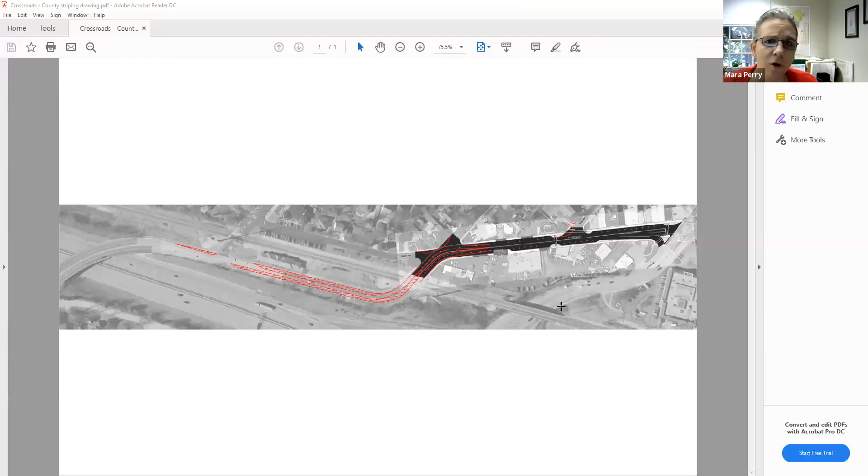Okay, so just as a reminder, hopefully you all remember seeing some of the emails that I sent back and forth last month with St. Louis County. They had come back at us basically saying you can't do anything, nothing in our streetscape. I went back with them as to the reasons why we should be able to do all the key elements that I thought were important in our streetscape, and why we didn't want to do what they were proposing at Baker and Gore.

And they came back again with this new email. So I forwarded the email to you that basically said, a little bit about how they believe that the striping would be done by the county.

And then he went into some detail, and the public works director and I have both looked at this email back from them, and we're still quite confused, because they've provided us with something new that shows the striping, which to us is kind of problematic. I mean, we assumed there was going to be striping to lead us into our area, but it wasn't part of our project and we didn't have funding for it.

And so when they started saying that we were going to have to fund it, we were concerned. He came back with some new striping, but he also came back still telling us that we need to expand out at the intersection of Baker and Gore, which I don't think they completely understand. It impacts two residents' property. We don't have in our budget to do additional work there, extend someone's driveway or remove someone's driveway.

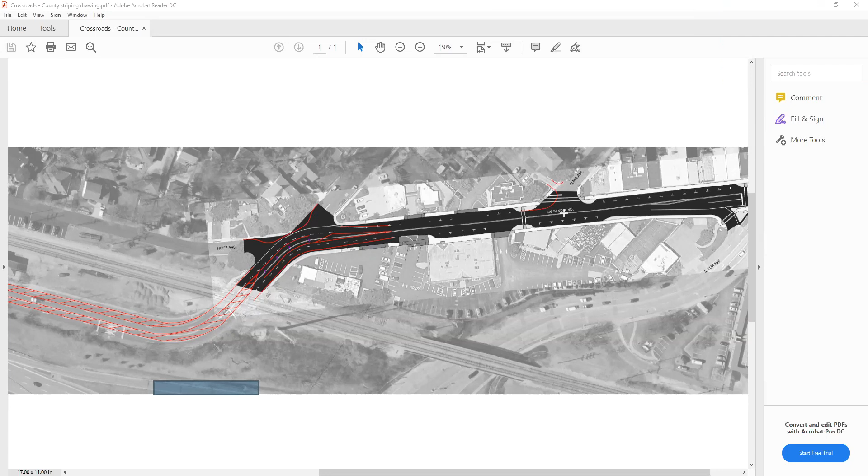So stop for just a second - this is such a basic sketch, it's not drawn to scale. It would have to be drawn by an engineer. So I was like, okay wait a minute, I think everybody's getting a little too caught up - there could be a possibility the engineers say we need to bump out.

Are you able to see my little mouse on my screen? Okay, yes. So there's a possibility that they'd be able to do a bump out over here.

In fact, you know what, I think I can even draw. Nope, that's the signature, hold on. Forget it, I was going to try to draw on the PDF.

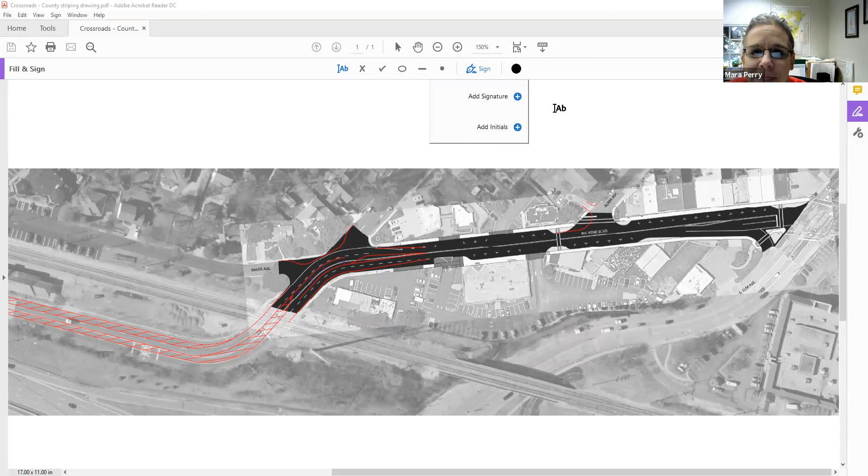I believe that they'd be able to potentially bump out on both sides and really shift the whole thing so it would provide the proper ability for it. Right now it does - I agree with you, it kind of forces you to bump out funny, but I think that's just because of how quickly they drew this.

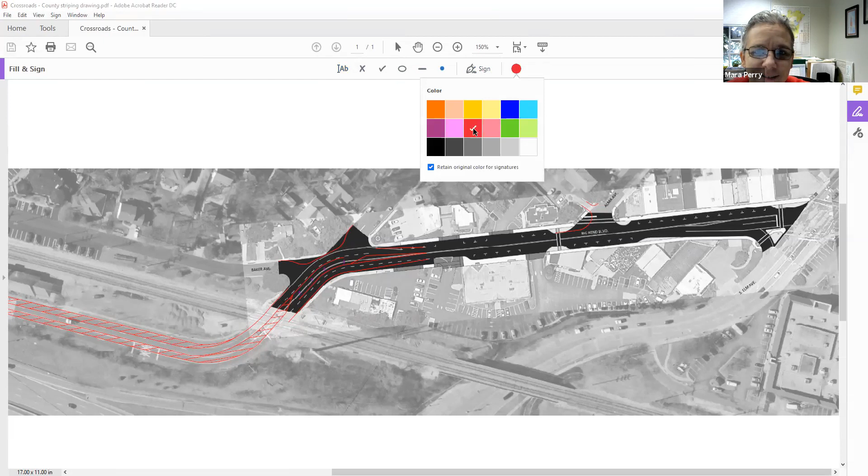Okay, that makes sense. Trying to see if I can draw. Ooh, wait, red? Oh no, that's for signatures. No, can't draw. I'm trying. Forget that.

Well Mara, this is Bob again. One overall comment I've got to the group is I thought we had a dead project. I'm encouraged that we've got the engineer, and this is the guy, Jim Knoll. I recognize his name now for years. He is the man, and he's got an interest in our project.

We may not like everything about it, and we're going to have to work with him, but it's indicating, Mara, do you believe the same thing, that they are willing to work with us, especially if we're getting to keep the bump outs.

Granted, the residences, that's not going to work. We've got to work more with them. And I think what Chrissy's saying is right, we've got to work on Alma. But if we can confirm that the bump outs we've got are going to be part of the project, we're accomplishing a lot of what we want. I would agree with you.

Jim ended the email saying, please consider, and hope this helps move your project forward. So yeah, I'm encouraged by that. Todd and I are still very confused because they don't explicitly say that they're allowing either the bump outs at Elm. Yeah, right. But they did continue to leave our bump outs and connected to our bump outs at Alma.

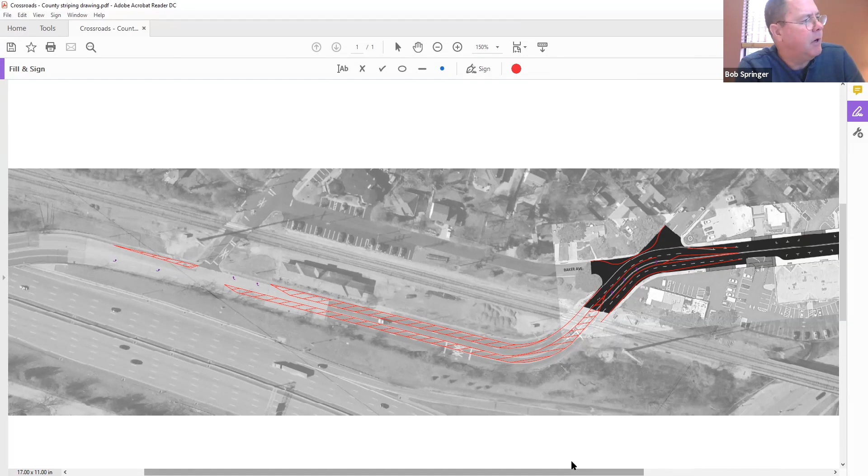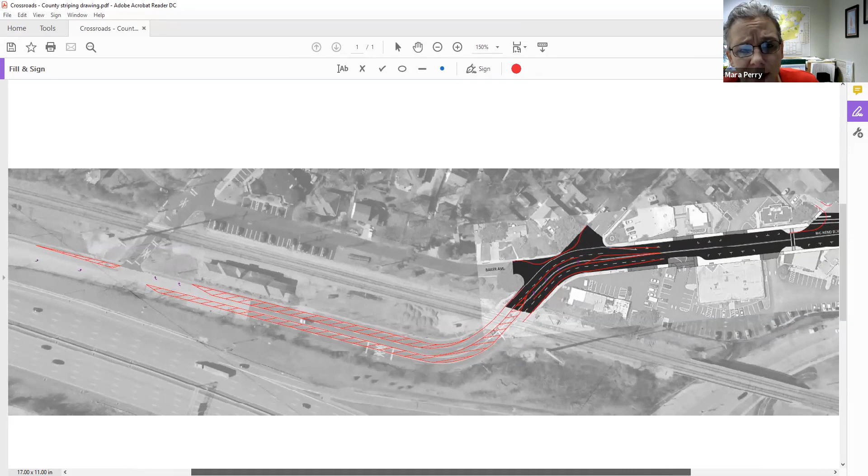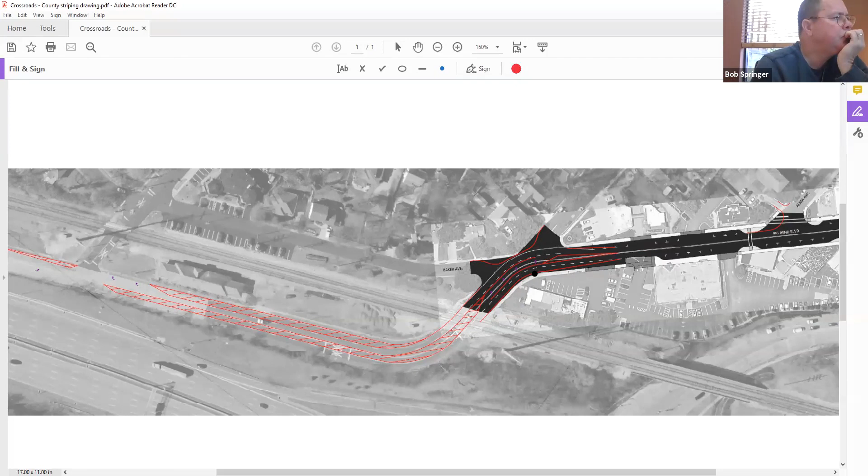Right now we're keeping it as two-way. We talked about doing the one-way, we talked about the neighbors doing it one-way, we had done a few different things with it. I think if we're going to do something as simple as this, we can keep it two-way. Some people are going to find it a little bit harder to cross when there's now the official turn lane. But right now, even as people are coming over the tracks, there isn't a dedicated turn lane, and people, if they need to go onto Gore, are going in the left hand of the two lanes. So it's going to be a little bit safer that there's a dedicated lane. People are still going to want to do that quick movement and go across this way, but again it should be safer - there's now only one lane coming across when it hits the tracks instead of two cars. So it's going to be safer, and it'll probably be fine remaining as two-way.

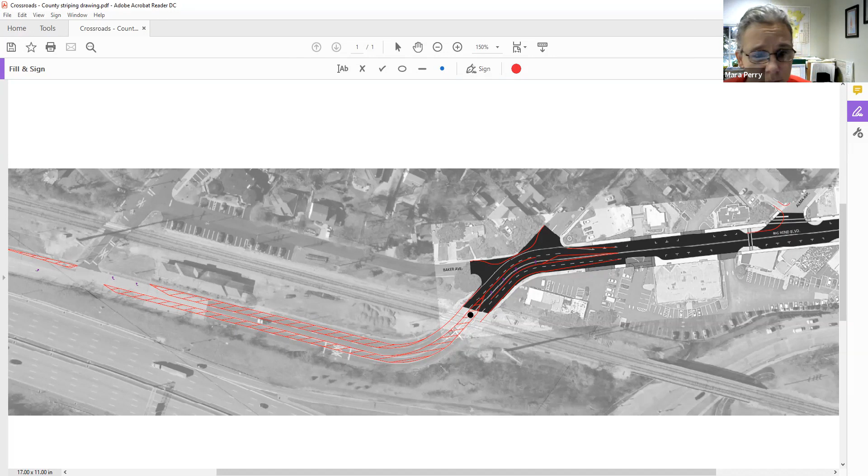So if everyone's in agreement, I can go straight to Cochran, throw it at him. I'll give him everything we got from the responses, so they see all the progression - them denying everything, my pleading of the case for why we should get all the things we were getting, and then their newest response - and see what they can draw up in more detail of actually engineering this out, so we can get some numbers, get some costs, and then send it over to county.

I'd say go for it. Does that include the elm bump outs also?

Yes, I would say we're putting the elm bump outs in, and they could probably fight us on it. We might still have a fight on that direction. But even if we had it as a second phase - I just don't know, once we put all of this in, whether we can do just these bump outs in the middle and all the sidewalks and have to hold off on the final bump out at Elm. That might be what we have. We really only have about $100,000, and I think when we looked at what we had before, that might mean that's all we have right now.

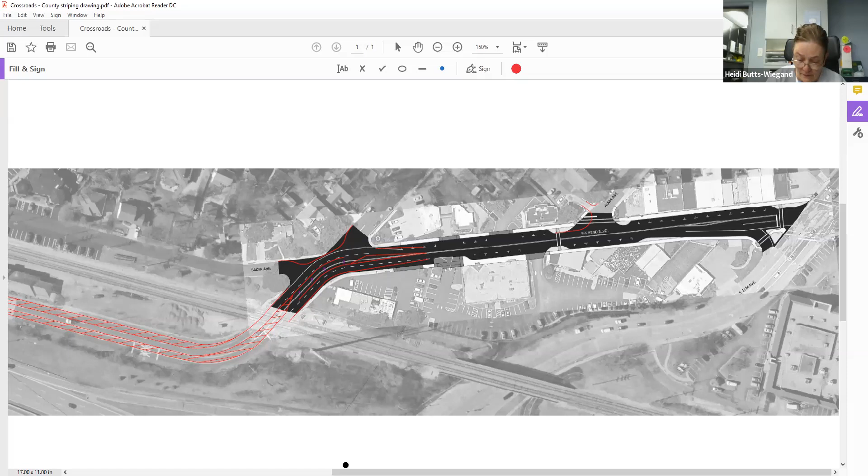If you guys are all good, that was pretty much our main agenda item. I can give you some updates on city stuff, but other than that, unless anyone else had anything specific. No. Do you want a couple quick updates? Sure, Mara, go ahead.

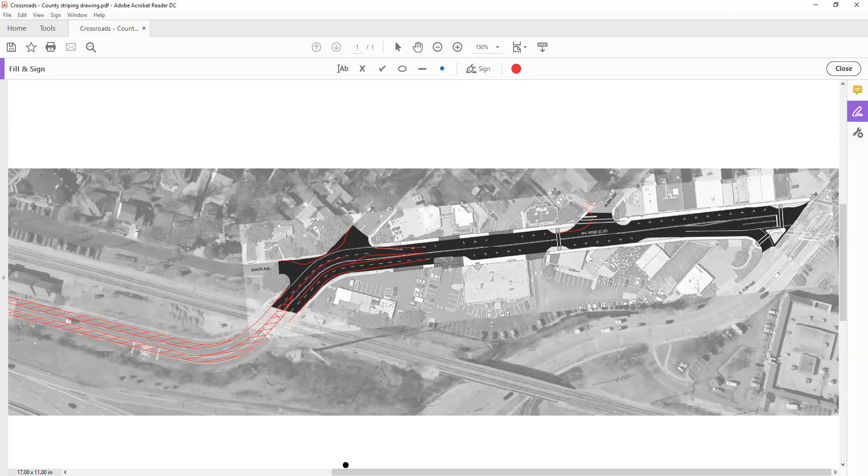So we are currently working on a couple of code amendments. The city council just had first and second reading on Tuesday night for some amendments to our parking code — sorry, they didn't approve it yet, they'll approve it at the next meeting. We did move forward with the city, with the plan commission. We are doing some code amendments regarding single family residential, as well as the potential option for some two-family use in our single family residential zoning A4 district.

So those have started conversations. They're supposed to help as some options on both the diversity of the types of housing that we have here, as well as some changes to the development of new houses that are basically lording over becoming too large on some of our substandard lots. So we're trying to look at maybe lowering the allowed square footage of some of those houses. We have some small lots less than 7,000 square feet that are getting houses that are 2,600 square feet. So we're working on both of those. Those will continue over the next few months before it goes to council.

We would continue to remind you that you can go to the city's website to see the Old Webster redevelopment area, which has had a number of town halls. All the town hall information is available on the website if you want to see what was discussed in that process. The next step of the process will be to go before the Plan Commission for a rezoning. So please keep your eye out for those public hearings, because that will be when we need as much public input as possible as they move forward potentially with that redevelopment project. I'm sure there'll be things in the Webster Kirkwood Times, and I'll continue to remind you as we have our meetings.

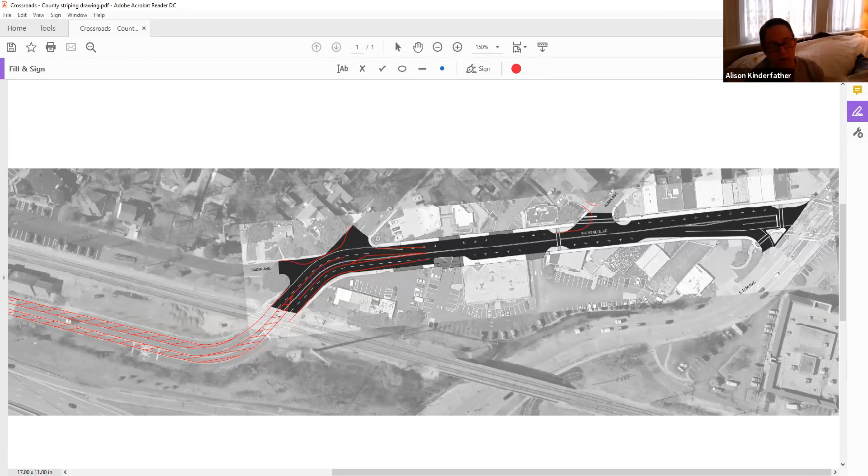Is the urgent care going in on Flowerama? No, that's not in Webster. Flowerama is not in Webster. Okay, it's the other corner - Subaru? Yeah, the Subaru. I always thought that corner needed a right turn lane from eastbound Big Bend to southbound Laclede Station. Those are not our roads. Neither of them are our roads. Don't start with that, we can't even get our own project done.

Okay, hold on a second. I'm going to show you the new ad that's on KMOV.

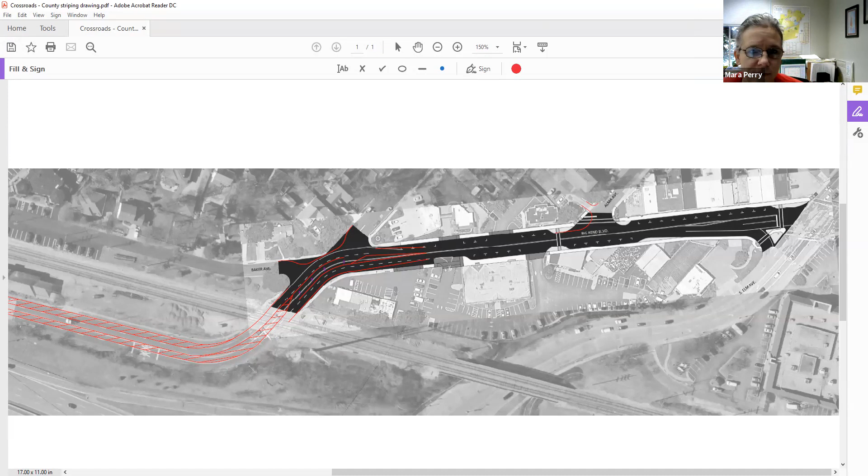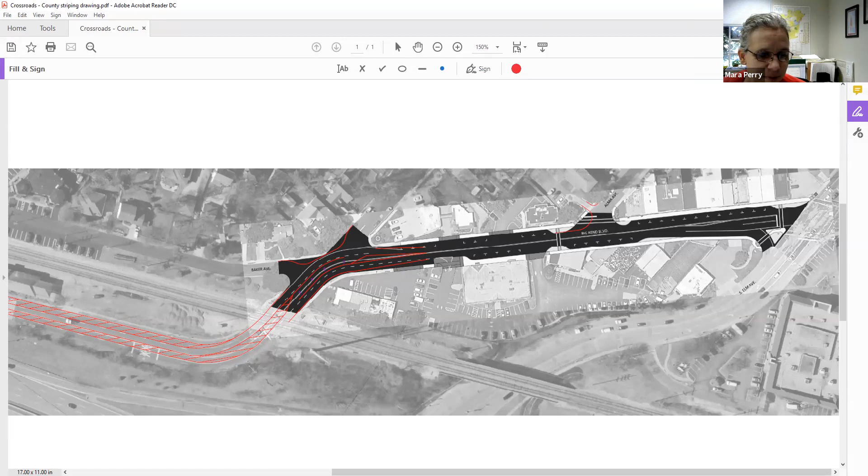When you shop local this holiday season, you're giving more than just... I don't see it, Mara. You're giving hope to business owners and the community they support. Hold on, experience the spirit. I think I have to share something different. Hold on, let me check. Are you still seeing my PDF? Oh, now we see, your PDF is gone. Okay, hold on. Can you see a black screen now? Yes, okay perfect, yes.

When you shop local this holiday season, you're giving more than just a gift. You're giving hope to small business owners and the community they support. Experience the spirit of the holidays and give hope this holiday season. Shop, dine, celebrate local in Webster Groves.

Learn more at explorewebstergroves.com.

So that's the new ad. It's on KMOV and on Facebook. If you're on Facebook, we have it on the Facebook page, which I think you can probably still see now since that's the part I'm sharing.

We also have a couple things we're going to do as part of promoting the holidays. We're doing, like we did last year, a like-our-page, share-our-information-about-Explore-Webster-Groves campaign, and you can win $50 in gift certificates and $50 for a friend. So you tag a friend, and we're going to do that.